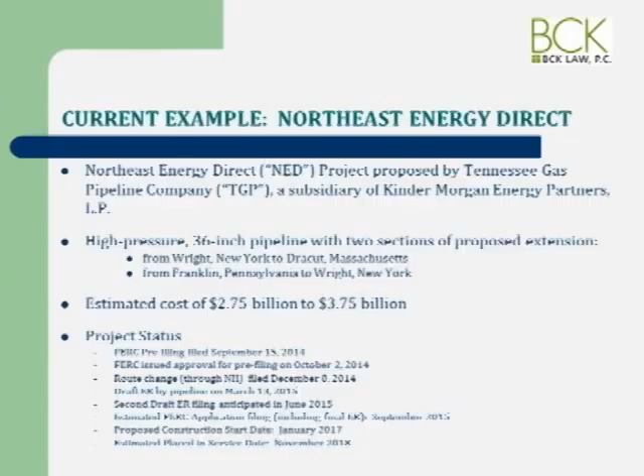So anyhow, what's happened, and there have been delays, and there often are delays in the process, but the consultation process is building up to a formal beginning of the process that any pipeline applicant has to follow. And we've heard that there is going to be a further delay.

They haven't designated the locations for the compressor stations. I don't know, are there any compressor stations proposed? Northfield, okay, I'm not as familiar with the Franklin County part of the route. The Berkshire Regional Planning Commission that we've been representing for nearly a year has offered some comments, and they and others have said that the information is incomplete. FERC seems to be agreeing with that, and before the formal part of the application process starts, Kinder Morgan is going to have to designate the compressor station locations.

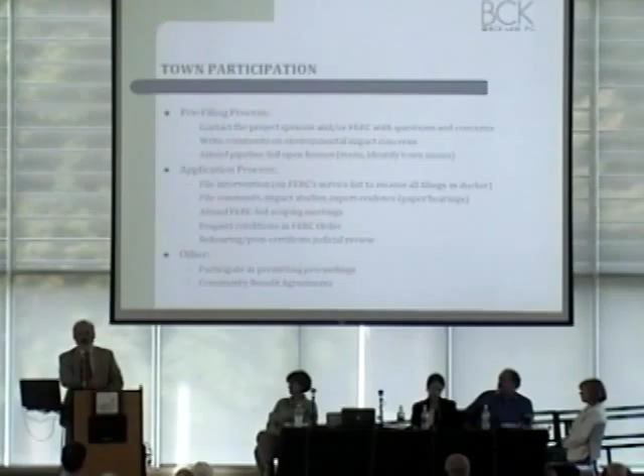Additionally, there will be other permitting proceedings, which for the most part are integrated with the FERC process. And some towns, and we've represented many communities, have chosen to enter into host community agreements or community benefit agreements. And those are agreements that spell out some of the environmental conditions, some of the construction conditions, they spell out terms. And contrary to what people sometimes think, some communities choose to enter into these agreements without necessarily taking a position for or against a project. But they take the view, some of the communities we've represented, that if the project comes, they certainly want to try as hard as they can to sensitize an applicant to what's going to happen.

And a recent example that I can give you, which is not a pipeline example, but it's a Massachusetts example, is we represented some communities on Cape Cod that would have been the host to a huge new underground electric transmission line had the wind farm off the Cape been built. I guess the project's not officially dead, but it's certainly run into a lot of problems. And these were towns that wanted to participate in the process, but to make sure that if there was a new significant underground energy facility, that the construction process, the economic terms, some of the things Marco's going to talk about later when he talks about the impacts of construction and operation of a pipeline—in this case, this was, again, an electric transmission line.

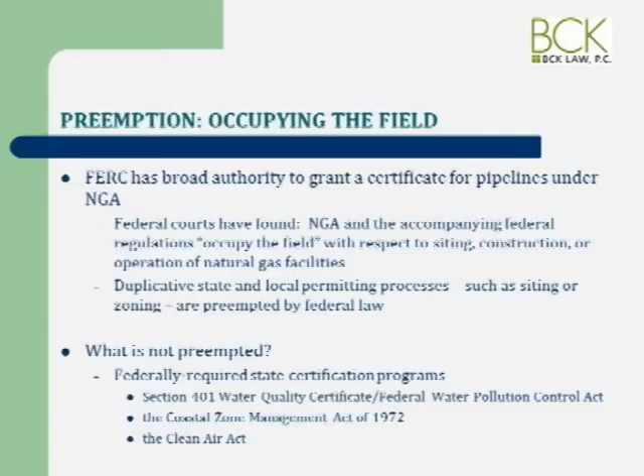Congress specifically carved out three federal programs in which some of the permitting and action is done at the state level. Section 401, under the Federal Water Pollution Control Act, covers water quality certificates, where some permitting goes on by, in our case, the DEP. The Coastal Zone Management Act, which obviously isn't going to have any impact here, and the Clean Air Act for projects that have air quality impacts.

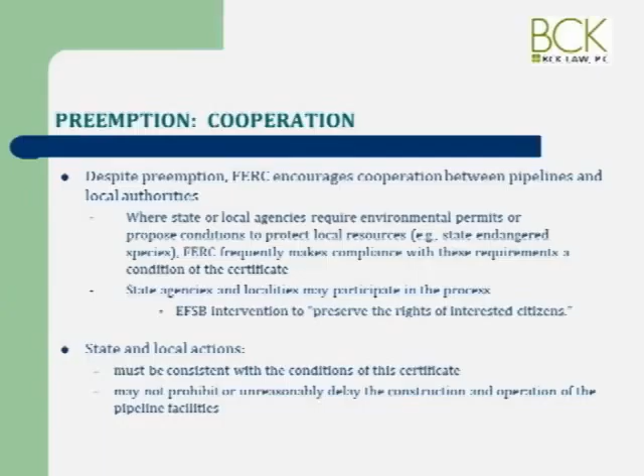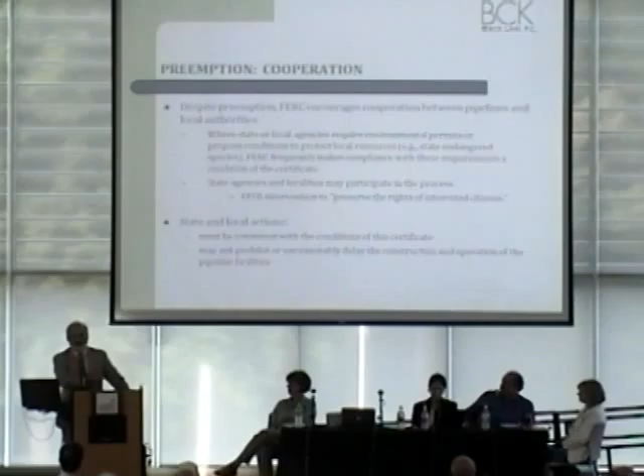FERC really encourages cooperation between the pipelines and local authorities. The siting board will intervene to try to preserve the rights of interested citizens, so they're in a sense an advocate. The Attorney General, I would expect, will intervene, though I don't know what level of resources the Attorney General's office will bring to this pipeline. The State Department of Energy Resources will likely intervene. I don't know, and some of you may know better than I, what our new governor's position is on this pipeline. They can intervene on permitting issues, and they can also intervene on the need for the pipeline. We'll get to that.

Notwithstanding what I've said, state agencies and local permitting authorities that have control over one or more aspects can and do issue permits and conditions that are generally consistent with the approval, meaning you can sometimes go farther. You can impose additional construction requirements, and Marco, I think, will talk about some of these issues from an on-the-ground technical perspective. But FERC will try, as I said, to harmonize its decision and incorporate that.

The standard, the last line of this slide, is that the state and local action cannot prohibit or unreasonably delay the construction and operation of the pipeline facility. So if a locality is trying to prevent construction and imposes a series of conditions viewed as so difficult, so onerous, where the real intent is not to get the pipeline proponent to abide by those conditions but to try to prevent it altogether, those are the kinds of things that FERC will override, or the pipeline proponent can go to court and wave its FERC certificate and say, look, the town of X has 500 construction conditions. They say they're all necessary, but they go too far.

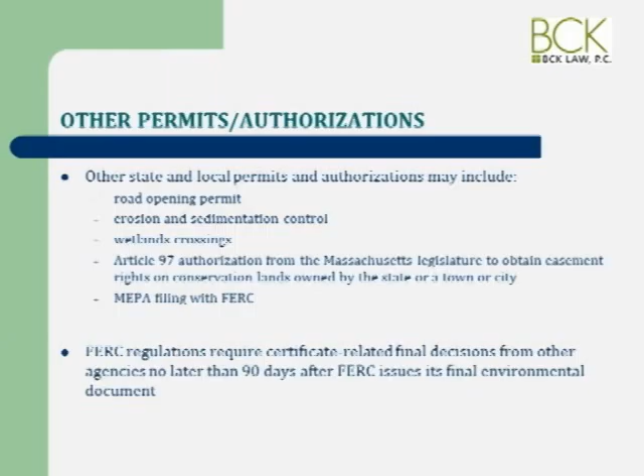Article 97, a big issue in Massachusetts. The pipelines are required to obtain Article 97 approvals. I am not sure what the answer is as to what happens if a pipeline needs to cross parkland or other land that's preserved under Article 97 and ultimately can't get approval.

I can tell you that in one case we were involved in, we had just such a problem, and we were in federal court litigating whether there was a carve-out here. We ultimately didn't get an answer because there was a settlement between the town we represented and the pipeline proponent that ultimately avoided the Article 97 land. So I don't know what the answer is to that, but I'm sure there are a lot of Article 97 issues, and there will be attempts to mitigate Article 97 crossings.

The Secretary of Environmental Affairs, of course, is involved - Secretary Beaton - and you need 2/3 votes of whatever local body has custody or control, as well as a 2/3 vote of the General Court. And I'm sure a lot of you, if you've dealt with the legislature, know it's hard to get 2/3 of the House and Senate to agree on anything.

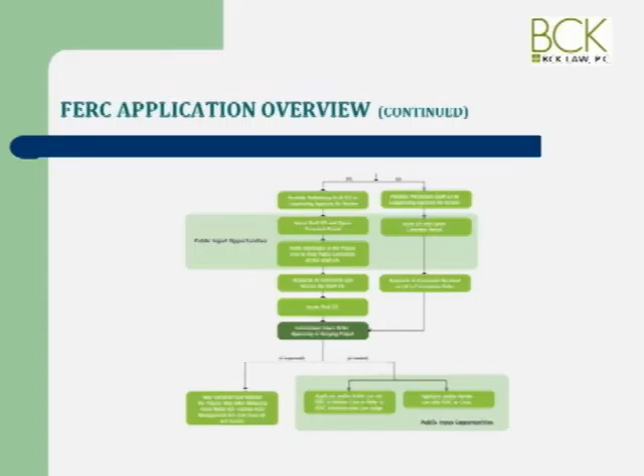I think probably most people know, but there are very few certificate applications that are denied. Some of them are withdrawn or changed, but there are very few cases in which a pipeline proponent goes all the way through the process and finds that their application is denied. FERC can place certain conditions on the order, and sometimes they'll incorporate public conditions, and I know of circumstances in which those conditions could not be satisfied, so that projects that actually got certificates didn't end up being built, or being built as they were originally certified.

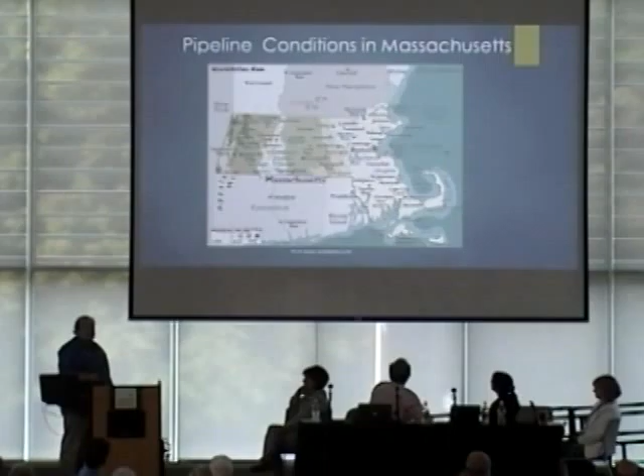Let's look a little bit about where we are geology-wise. We're coming through the mountains here, right where we are in the Connecticut River Valley. So we're going from uplands to the lowlands. If you start looking at some of the characteristics, that alone creates some interesting issues related to pipeline design and construction. We're going to have to go through rocks, through some soft clays and the varved clays in the valley, and under a number of rivers. Then you've got all the high upland marshes and such that we have to look at.

Potential conditions along a pipeline route, particularly through western Massachusetts: we're going to have areas with clays, glacial till, shallow rock, and slopes, all having major implications regarding alignment selection. Thrown on top of that, we've got streams and wetlands, and then crossings of roads and railroads, which have their own special set of characteristics.

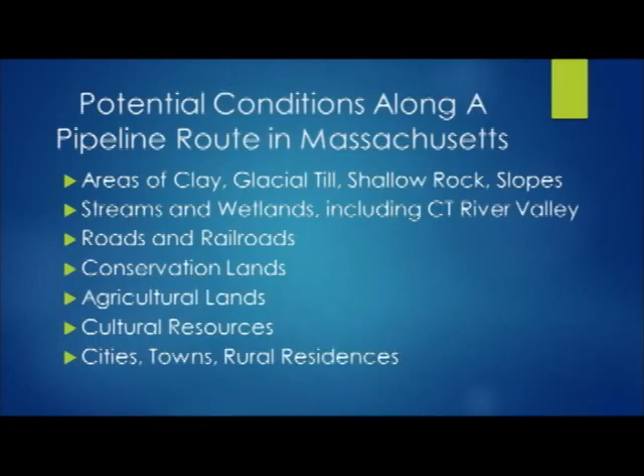We've got conservation lands, agricultural lands, and one of the things in the western part of the state here that you don't see in some other states where they have major pipelines going through is that our agricultural lands aren't just grazing lands or crop lands. We have agricultural lands that are woodlands or orchards with certain special needs. We've got cultural resources ranging from historic areas, cemeteries, to possibly Native American areas that need to be preserved for archaeological significance. And then we have cities, towns, and rural residences.

When you start looking at alignment selection, how does the pipeline company want to come about this? We can be really cynical and say they want the straightest, cheapest way of getting there. That's true to a certain extent. They're also interested in safety and long-term life of their line, because this is not an insignificant investment. And if this line goes down for any reason, it's money lost down the road. So they have a vested interest in trying to make something within what they think is safe.

When we look at safety, things that come up right away are explosions - they get notoriety. Turns out most of the explosions we often hear about are older distribution lines, not the main lines, and they're older cast iron segments. Or the other thing that happens is everybody must be familiar with DigSafe and these one-call systems you call before you dig - people go out and willy-nilly excavate down, and these lines aren't very deep, so they hit them, rupture them, and scrape along some rocks and cause a problem.

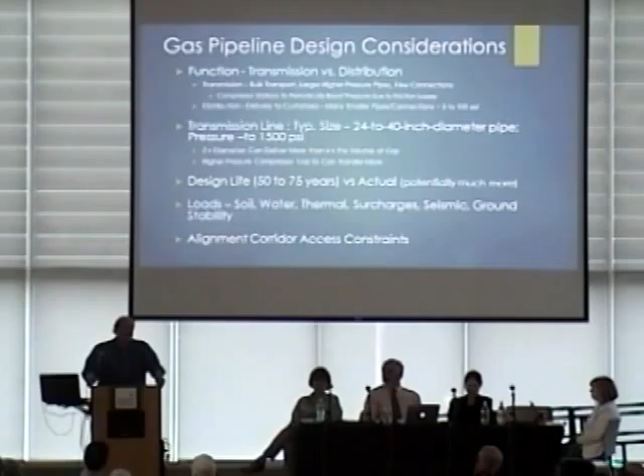The final thing is access constraints to get on the corridor - environmental and cultural considerations, and corrosion. This is the big thing, because when we talk about design life, what's the major effect going to be? It's how much corrosion there is and how fast corrosion progresses.

Today they've gotten much better at dealing with corrosion. There are a couple of ways of dealing with it. One way is to put a thicker section of pipe, so that before you get down to the minimum section needed for stability, it still performs adequately. The better way, and the way most regulations go, is you put a coating on the pipe. Today, a lot of the major lines are coated not only on the outside to protect the steel, but on the inside to protect the material.

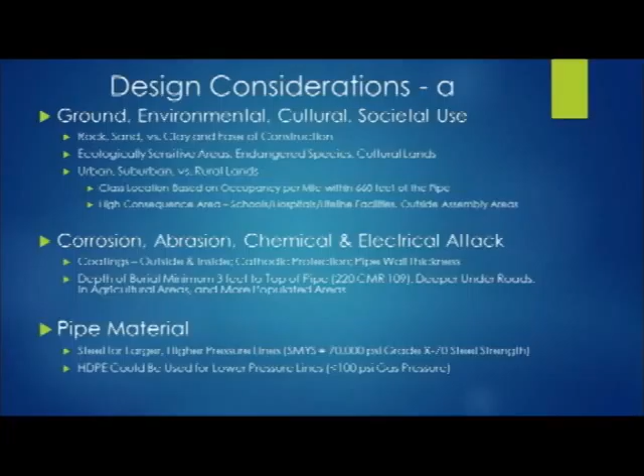The last thing is that they often try to site things away from major sources of electricity. That's why it's less common to find metal or steel pipes near high tension lines and things like that, because stray currents in the ground promote corrosion. Abrasion is another factor - will plows hit it in an agricultural area, and how gentle are they about putting the pipe in - that becomes a concern.

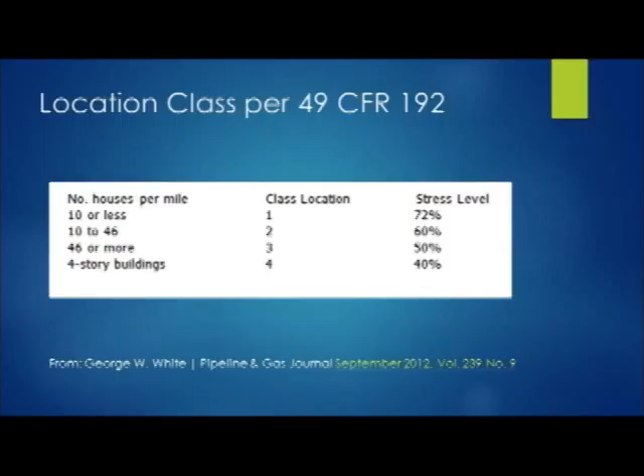An important factor is the location class. This is out of the Federal Register: if you have 10 houses or less, you're in class 1, and you can use 72% of the safe yield of the pipe steel. As we get into higher density areas, in class 4, we can only use 40%. That's quite a drop. That means for the pipeline to carry the same amount through a class 1 area versus a class 4 area, the class 4 pipe has to be thicker.

The other thing this tells you is that the classification applies along a corridor. Technically, it's 660 feet on either side of the pipeline. They count up the houses per mile, and they have different ways of handling overlapping miles and things like that, so it can't be skewed one way or the other, in order to come up with this class.

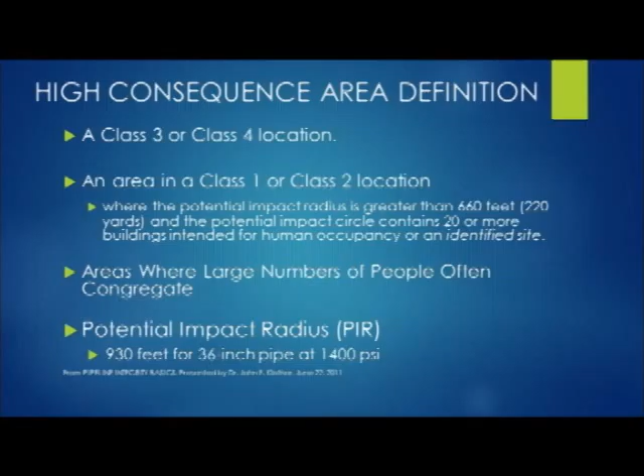For the higher pressure pipeline, because it's high pressure and large diameter, we're going to have a potential impact radius of about 930 feet, based on the numbers used to calculate these classes. Also, classes aren't just about how many houses there are, but they look at beaches and parks that have high occupancy for a certain number of days a year. They take safety quite seriously in terms of the regulations.

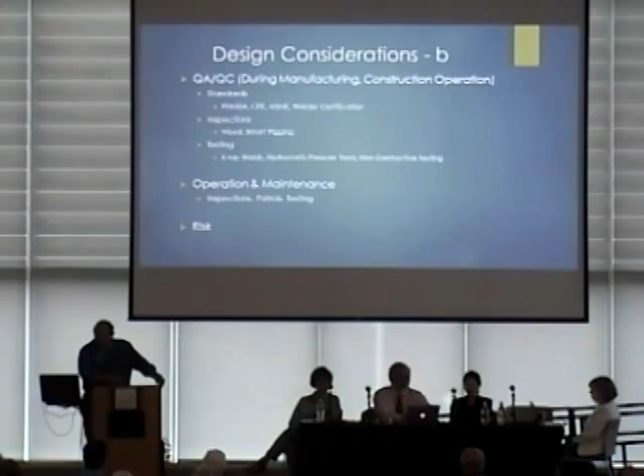The last things I want to talk about in designs are quality assurance and quality control. In design of pipelines, or most any construction, this is truly important.

For example, all these coatings that people put on the pipe—if workers are rough with the materials, dropping it, scraping it along, they end up scratching away the coating and creating corrosion points. So that's really important. How you install the pipe and what kind of materials you put around it matters. Sometimes if you have no choice but to use coarse angular material, you may put a buffer wrapping over the coating to keep things safe.

Other important things are the inspections. Not only do you inspect during construction, but there have to be periodic inspections, and particularly for newer pipelines, they use what are called smart pigs. These are instrumented carriers that run down the pipe and measure things like the radius and diameter of the pipe, and any changes in thickness ultrasonically. They'll even take samples along the way to check for liquids at the bottom of the pipe that could be corrosive.

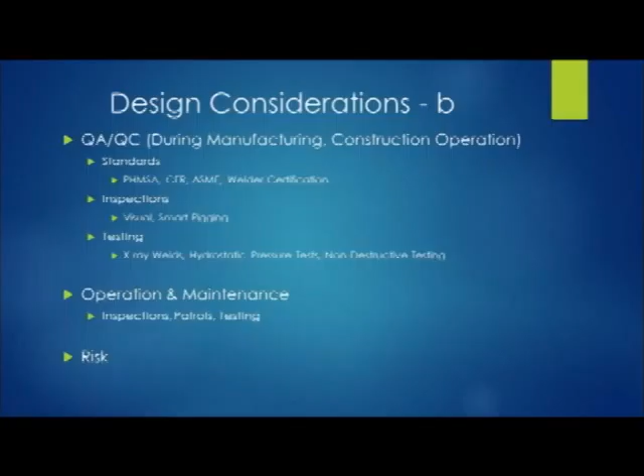During operation and maintenance, they go along the corridors with sniffers to detect gas emissions, and they also check at their metering stations how much gas has come in and gone out. Interestingly, gas is tough to deal with because as pressures change you have to account for that, and it's not the simplest thing in the world. But they try to keep track of it, because any gas loss is money lost to the company.

The other part is risk. As town folks in the area, we're worried about the risk to our environment, health, and safety. The gas company is also looking at monetary risk, and even though they might be fairly mercenary about it, their ultimate interests tend to be similar to ours in terms of safety, because something that's safe also reduces their monetary risk.

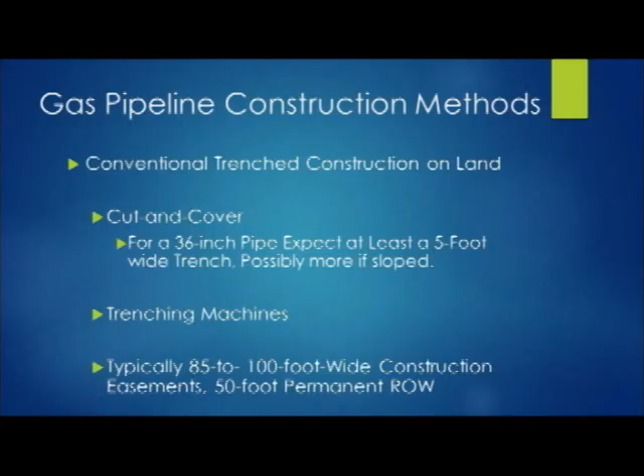Pipeline construction methods: the conventional way is cut and cover—cut a trench, put the pipe in, backfill it, and go. You may do it with a backhoe or with trenching machines, depending on the materials. The right-of-ways are quite wide, 85 to 100 feet, and the permanent right-of-way easement is about 50 feet with the pipeline in the middle. That means the area where someone can use their property again without much restriction is about 25 feet from the pipeline.

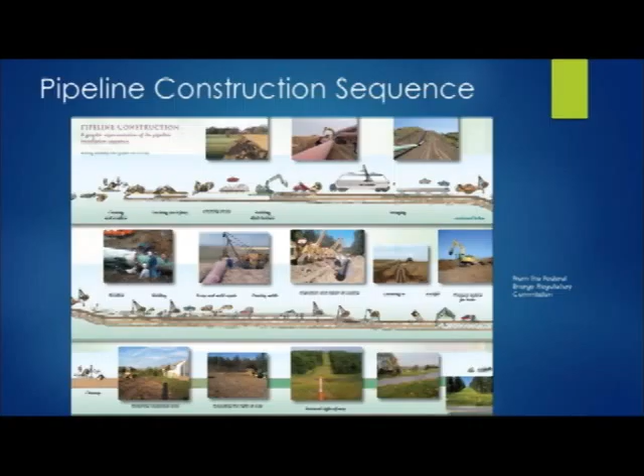In the process of pipeline construction, we have to grade and clear the pad, string out the pipe, connect it up, do a bunch of welding, lay it in, then start backfilling and restoring. But we're going to have a swath of open land—if it was woodland, it's not necessarily going to be restored to woodland, because they need to access it along the pathway for inspections. Also, roots of larger plants are kind of an enemy of this whole thing—they attack and move around pipelines, and can sometimes introduce acids into the ground in the area.

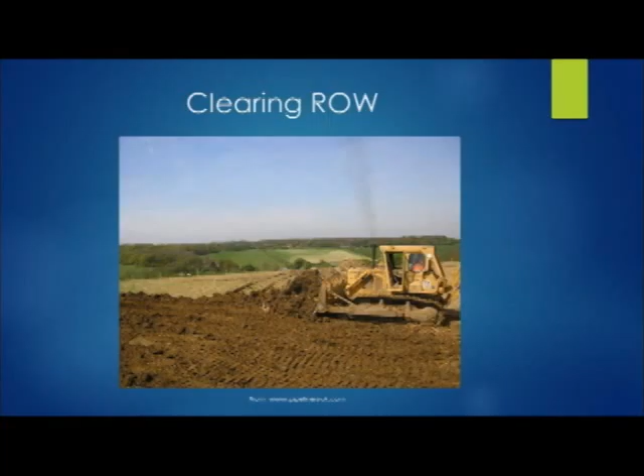Clearing the right-of-way opens it up with a bulldozer. This doesn't show much in the way of silt fences and erosion control, but the runoff from something like this, if we get one of our gully washer storms, particularly on a slope, is something to be concerned about. Is that going to run into your wetlands? Is that going to run into your streams? How's that going to affect fisheries and such?

The pipe's going to be laid out. This is a steel pipe project here. The pipe comes in usually about 40-foot lengths, coated in the factory with a fusion bonded coating, but bare ends because they've got to weld the ends. And the ends, they're not only bare, but they're beveled, because when we do welds, you can't just put two flat pieces together with pipe this thick. It's got to be beveled to be able to do the welding.

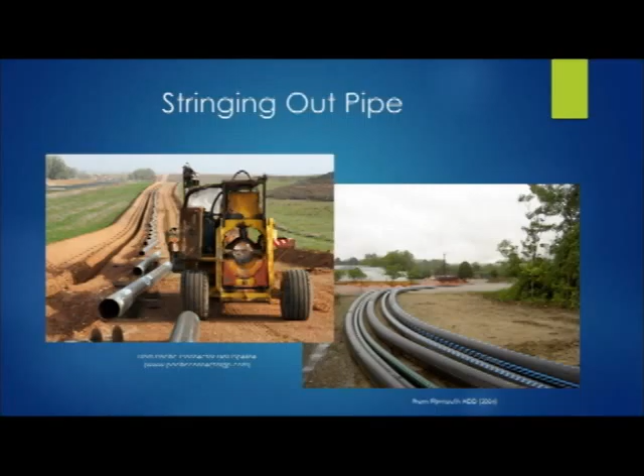This is, I believe, a bending machine here, because these pipes come in straight pieces, and you've got to go around up and down hills and around corners. They have to put gentle bends in them. For things up to about 24 inches, they kind of bend them out on site. For things like the 3-foot diameter pipe, they're often factory bent. Your concern with bending a pipe is, I've got a coating on here, and if I bend it, how does that affect the coating, and do I have to repair it?

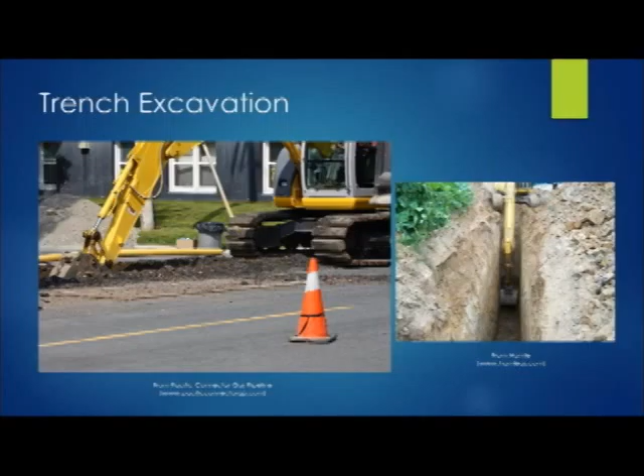Trench excavation - you can look at things with a typical backhoe. This is one in soil that stands up pretty capably. It's not something where you want somebody to go down in a hole like that. Generally for the pipelines, the bottom of the trench is probably 6-7 foot deep. It might be sloped back a little bit. The bottom of the trench is about 5 foot wide. The top could be 7 or 8 foot wide or more, depending on whether the soil is sandy or more clayey. More clayey soil tends to stand up short term a little better.

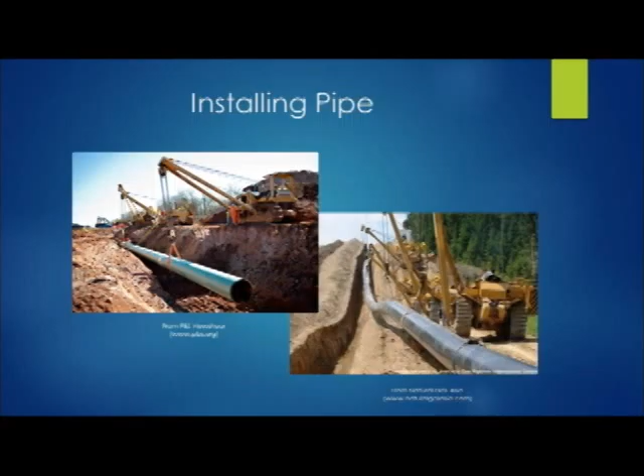Then they lay the pipe into the ground after it's been pulled together. As you see the coating, they've welded it. What they've done here is, instead of trying to weld all the sections together in the trench, they will weld 2 or 3 sections together up on the surface where they can get at it with more ease and get around. Because the easier it is to get around the pipe to weld it, the better the quality control on the welds. They do welds by hand, but they also have a lot of machines that do welds now. It's interesting - using a welding machine, mechanized welding, doesn't allow you to get rid of the certified welder. You still have to have a certified welder operating those things to know what they're doing.

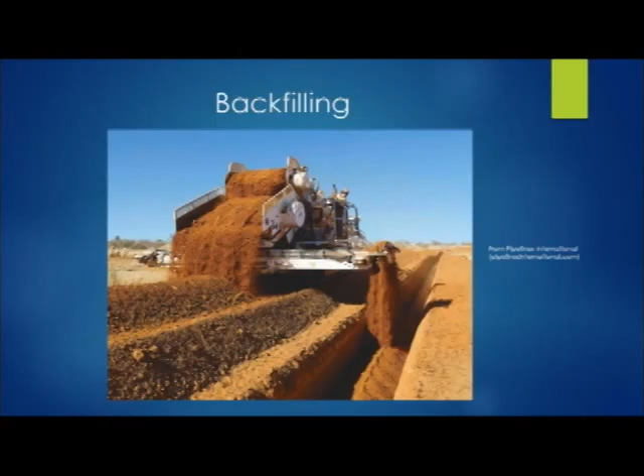Backfilling - this is a nice benign soil. You look at it, you've got a few things that are larger here. Usually what they do is screen it as it comes off, and within the proximity of the pipe, they try to put a bedding down under the pipe. That's a finer material, and they try to put around and above the pipe to about at least a half a diameter above the pipe of a finer material. Then restoration - they're trying to clear up things, grade things off, plant it.

So in the pipeline construction, we went through some of this already. When you weld that, we have those uncoated ends that are welded - they have to do field coatings of that. Anytime you deal with something, a factory coating is usually superior to the field coating, but they're out there and they have to field coat things to protect it. They usually put on thicker coatings. When they do field coatings, they not only do the ends that they weld, but someone has to go along the pipe and see if they got any dings in it, holidays, scratches that are sufficiently deep that they expose bare pipe, and they need to apply a dab of the coating material.

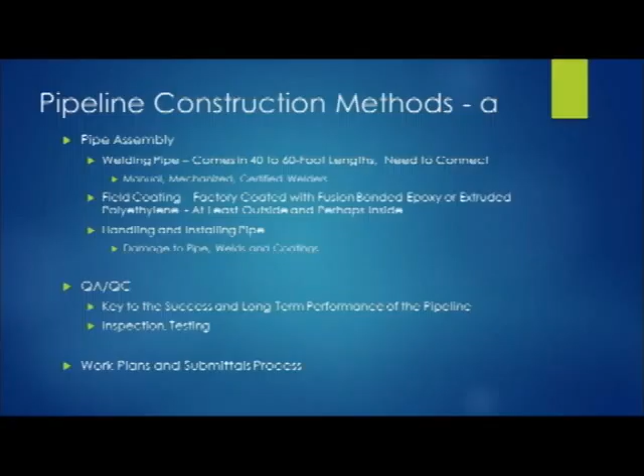QA/QC is an important part of this to get long-term performance of the pipe. Not only do they do inspections, but once the pipe is put in place, before it's put into service, it's got to be hydrostatically tested.

Tests usually go to about 50% more than the maximum pressure the pipe is expected to take. What they do is fill the pipe with water, and then apply pressure. You say, why water? We're putting gas into it.

Well, if I put just air and pressurize it, and I have a leak, the air is so compliant that I can have a significant leak and not see much change in pressure, because it's a real soft spring. Water is essentially incompressible, and when I apply pressure, a leak shows up much more quickly. These hydrostatic tests keep pressure on a section of pipe for 8 hours at 50% more than the design pressure, and there are requirements on how much of a drop is acceptable in that 8-hour period.

When you look at a pipe like this, you ask, what's going to cause it to fail? If I pressurize the inside of the pipe, I immediately get somewhat of a pressure drop because the pipe expands a little bit. But after that, it should be relatively stable and not keep creeping and expanding. Any pressure losses start to point to leaks. But a little change in temperature of the fluids can also cause changes in pressure, so it takes a fair amount of experience to monitor and tell what's happening.

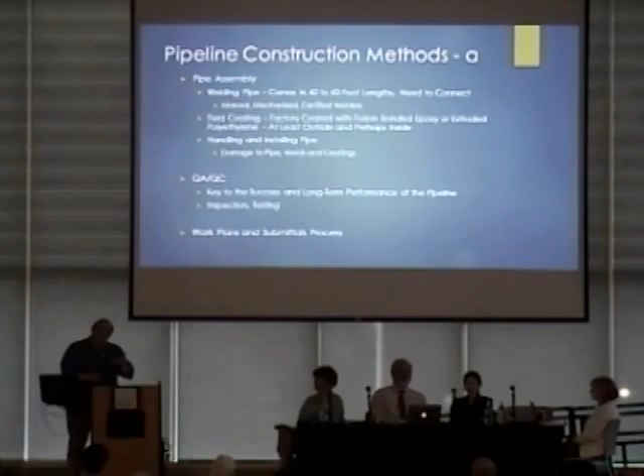In looking at anything with a pipeline, you really want in your specifications to have work plans and submittals that are very important. Even though you might have specified in the specifications what the contractor was going to do, you want him to tell you what he is going to do, to make sure you're both on the same page.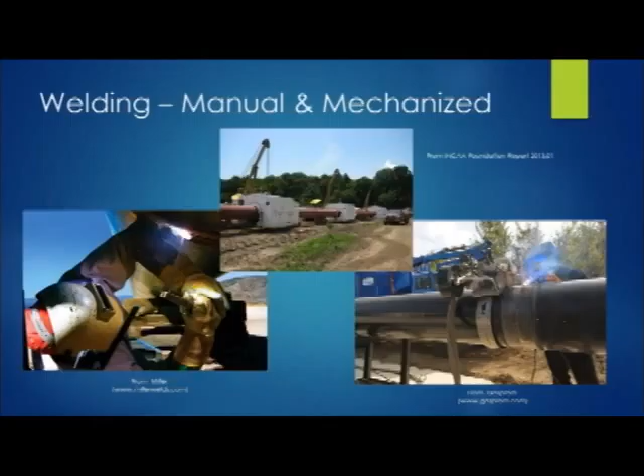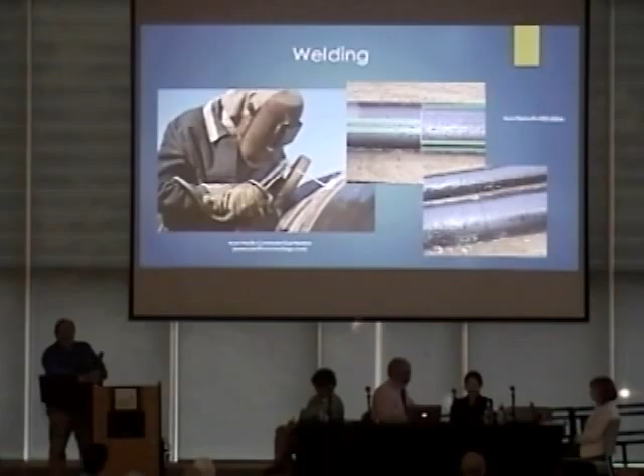Mechanized welding, hand welding, the guy working upside down, and here's another mechanized welder. You can see they've got several working to try to get as much pipe joined as they can. This guy's on his second pass. This isn't something that takes minutes — it takes hours to join pieces of pipe, because it's not just one pass. You might have 3 or 4 passes of welds depending on how thick the pipe is. Then they go back and recoat the areas that they welded, or do spot checks.

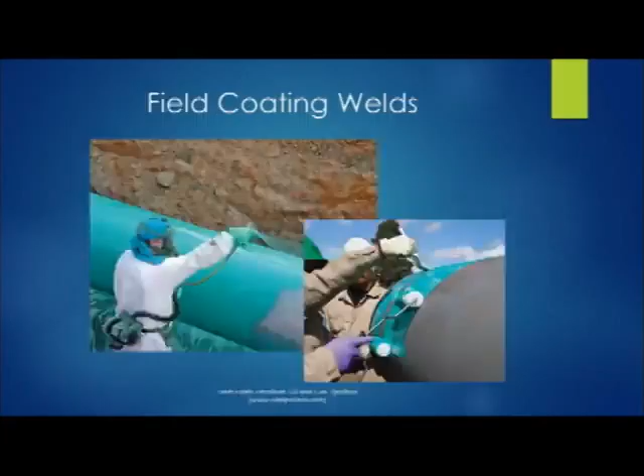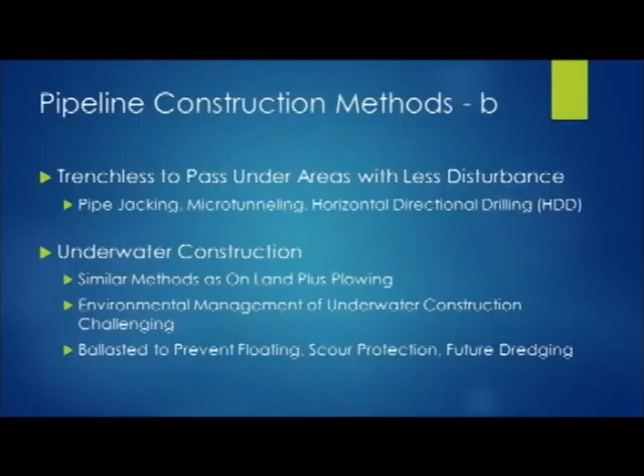Let's look at methods that can go under areas with less disturbance. We're going to look at some trenchless methods, and ways of crossing water. There are trenched and trenchless approaches, but today the preferred option is usually to go with a trenchless approach.

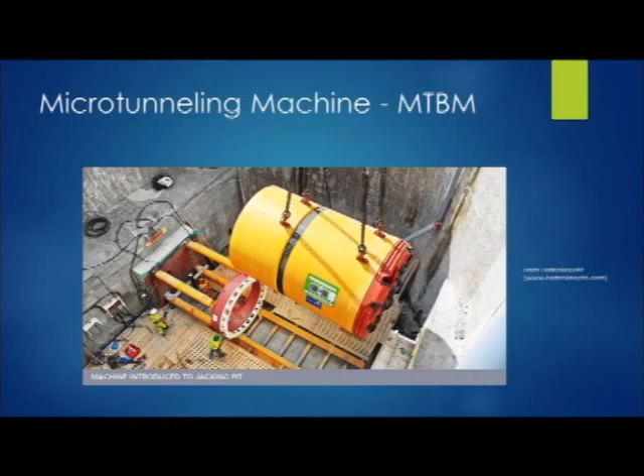This is a microtunneling machine, a boring head. They can range from 24 inches to 60 inches, or 72 inches or more, in diameter. You put pipe down behind it and push it in. This is a fairly short pit — usually, with gas lines and things like that, you want a pit that's 40 feet long, to take 40-foot sections of pipe, because it's more efficient.

These tend to go more or less horizontally. You could go down a little grade and up a little grade. They've got corrections to steer, and you can get under rivers and various types of areas.

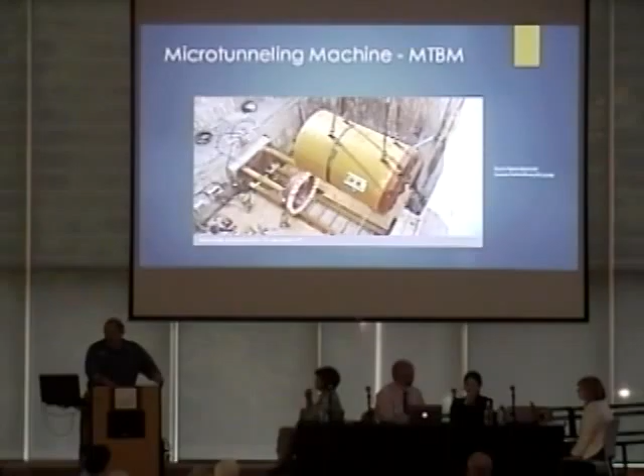One of the cardinal things with these machines is they're really good in one type of material. If you have two very dissimilar materials — or like some of the material we have here in northwestern Massachusetts, with a lot of cobbles and boulders — it's a real headache for these machines. So when we try to site locations to use these, we try to figure out where the top of rock is, and we want to be either down in the rock or up above it. We also look at whether there are a lot of cobbles and boulders in the layer, and if so, try to avoid those zones. So it puts a premium on doing geologic investigations.

The method that's more often used is called horizontal directional drilling. What we do is drill from one side to the other. When we get to the other side, we pull in an enlarger back. And then after we pull in the enlarger back, we pull the pipe through.

Well, this initial string that they go through is usually for something like going under the Connecticut River with a 36-inch pipe. We're probably going to have what's called a maxi machine. It'll have about 1.5 million pounds of thrust and pullback, and the drill steel on it will be between 6 and 9 inches in diameter.

It's a pilot hole, so it'll be someplace between 6 and 10 inches in diameter. To enlarge it, depending on the materials, we enlarge in successive passes, with increasing passes until we get to a sufficient diameter to take in the pipe.

And a sufficient diameter for taking a 36-inch pipe is actually something getting close to 4 feet or more in diameter, the hole. Because you're trying to pull this pipe down through and around, and one of the things that happens with a steel pipe, the rule of thumb is the pipe can have a radius of curvature of about 100 feet for every inch in diameter the pipe is. So a 36-inch diameter pipe, the minimum radius of curvature you want to bring the pipe around is about 3,600 feet. So you have to design these crossings to accommodate that.

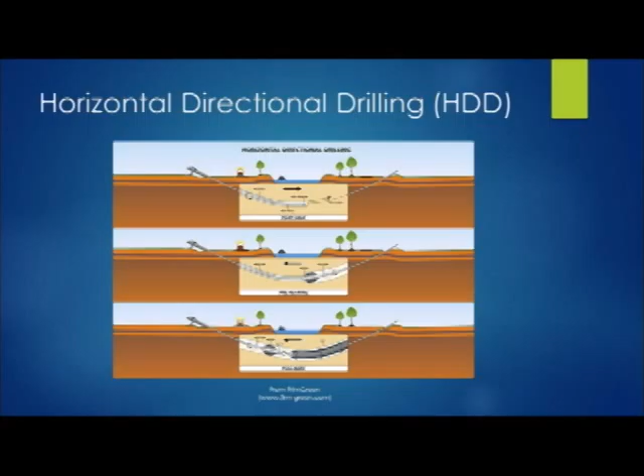When drilling this out, we're drilling with slurries under pressure to take away cuttings, and you want nominally 15 or minimum 20 feet, 15 to 20 feet of clearance between the bottom of your river and the drill path that you're going.

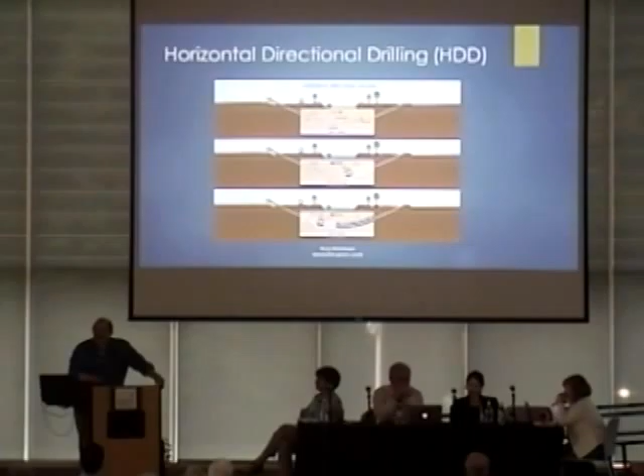I usually also look at it in terms of what do I think the soils are. If I think the soils are really dense materials, 15 to 20 feet feels good. If I think it's a lot of open-work cobbles and things like that, I sometimes want to go deeper. Or if I think it's really soft, silty material, I sometimes want to go deeper. Because what happens if this is a little too shallow, we might have material coming to the surface in the wetlands.

Now these slurries, most of them use bentonite and a gum material. Bentonite is a clay material, so in terms of causing contamination, it's not bad, but bentonite doesn't settle very readily in water and can sometimes have an adverse impact on fish life and things like that, because it's so fine and gets in the gill.

So we do a lot of work to try to avoid inadvertent releases. And going under rivers, what we try to do is have means available to detect when we see something, and that's usually a gray cloud. Then we have silt curtains and things to go around it, temporarily stop drilling so we're not adding fuel to the fire, so to speak. And then there are various ways of putting containment layers over it.